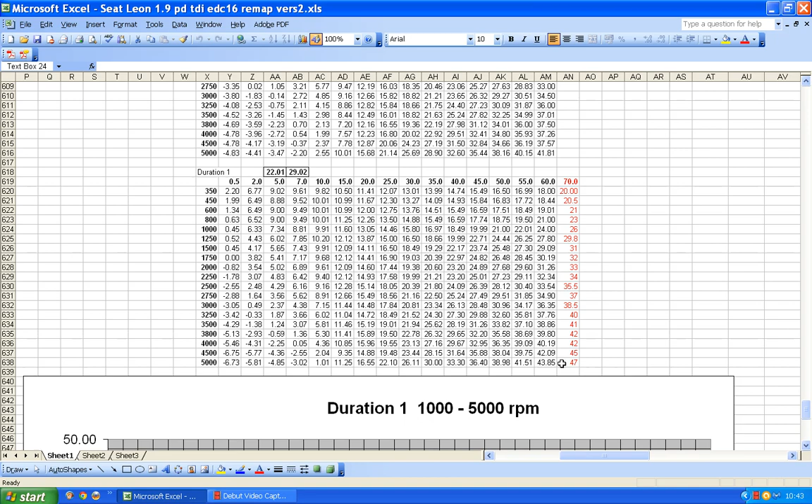So that 27 degrees is the exact point, instant injection of fuel. We know that we are going to be wanting to inject at this point, according to this map, 60 milligrams. And if we go to look at the map that we've been told we should look at, the duration 1 map, there we have 43.85 degrees. So in other words, 44 degrees more or less.

So what we've got then is, I'll put it there, a start of injection which is 27 degrees. So that's what we've got there. In fact, it would be better probably if I put start of injection up there, wouldn't it? And if I say that's my start of injection point, I'll get rid of that.

Let's just format these to ordinary numbers. So I'll just have cells numbers, and we'll have 1 decimal point. That will do us for now. So we'll have start of injection. I'll make those bold as well so we're clear.

So we're going to have our start of injection point of 27, and we know that that's going to give us a duration value which we just saw over here, 43.85. So we're going to have a duration of 43.85 degrees in there. Oh no, I'll make that 2 decimal points. Sorry, I was a bit stupid there, wasn't I?

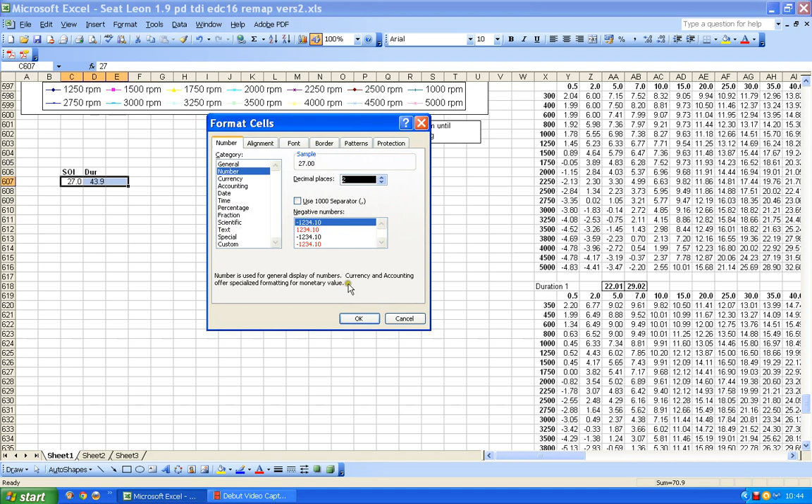Number, 2 decimal points. So okay, we've got a start of injection of 27 degrees and we've got a duration of 43.8 degrees. So we can calculate end, I'll put E, a little O and a big I. We can say when injection is going to end, can't we? I can call that end of injection. So I've got start of injection, an amount of time for injection, and an end of injection. So I can say to myself, right, if I start there, this is where I will end.

Now remember, this one is before top dead center. So if I assume that that is 27 degrees, if I then say to myself, right, now this number here will equal that number minus this number, that seems to be complaining for some reason. Oh, it hasn't got enough space for the minus sign, that's what it's complaining about. So we'll just extend that out a fraction. So there we go. It's giving us minus 16.85.

In other words, 16.85 degrees after top dead center. So what we've now got is a start of injection at 27, a time for the injection of 44 degrees, and because that injection is so long, we are not going to finish injecting until nearly 17 degrees after top dead center.

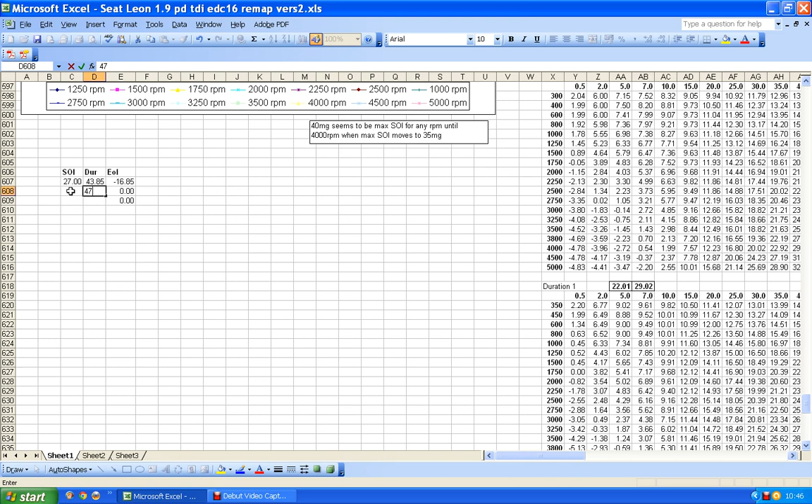But then I leave the start of injection in the same place as I did before. And sorry about the way the numbers have gone silly on me. Let's just format those. Number, 2 decimal places, that will do. Okay. Now I'm finishing at minus 20, in other words 20 degrees after top dead center. So I'm starting at 27, I'm going for a duration of 47, and I'm ending at minus 20, which is 20 degrees after top dead center.

Now you can see that if I'm not careful, I'm going to come really unstuck here, because if the designers thought that 27 and 44 there were okay, so that they could end at roughly 17 degrees and still get power, then that's okay. Now remember, at 17 degrees after top dead center, the piston is starting to go down before the combustion stroke is even pushing it down. Now obviously the engineers have worked out that that is just about okay there.

Now why didn't they just say, well okay, we'll increase that and we'll make it 20 or 30 or 35? Well, they didn't, because if they're not careful and they go to something like 20 degrees after top dead centre, the piston may already be moving too fast down the cylinder for the actual explosive combustion to catch it up. In which case, we are not actually adding any energy to the piston, because the piston's moving away from us faster than the explosion that we're giving.

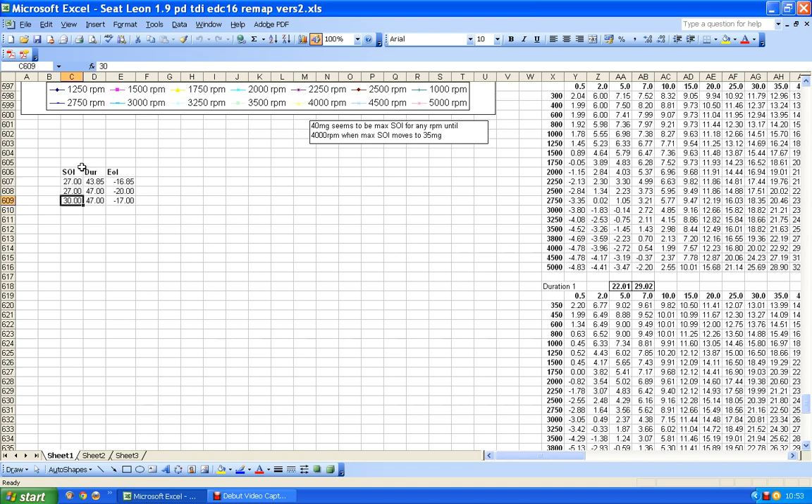So in other words, if you've changed duration and you now feel that you must change start of injection, you don't really change start of injection by changing start of injection, because what you need to do is look closely at your duration values, look closely at where that will leave your end of injection, and then look at where you might want to shift start of injection to allow that slightly longer duration. So the whole thing really starts with duration, even though start of injection selects duration maps. Seems daft, but that's just the way it goes. So you start with your duration, you look at where the start of injection might be, you look at where that means you might end, and then you look where perhaps you should consider changing the start.

Now, I suggest, and some people have argued with me about this, but I suggest you never make a change of more than 1 degree at a time. So in other words, if you decide that you want to increase duration and you want to do it in terms of thinking to yourself, I might have to move start of injection because of what's happening at this end, then I suggest you never go more than 1 degree either way.

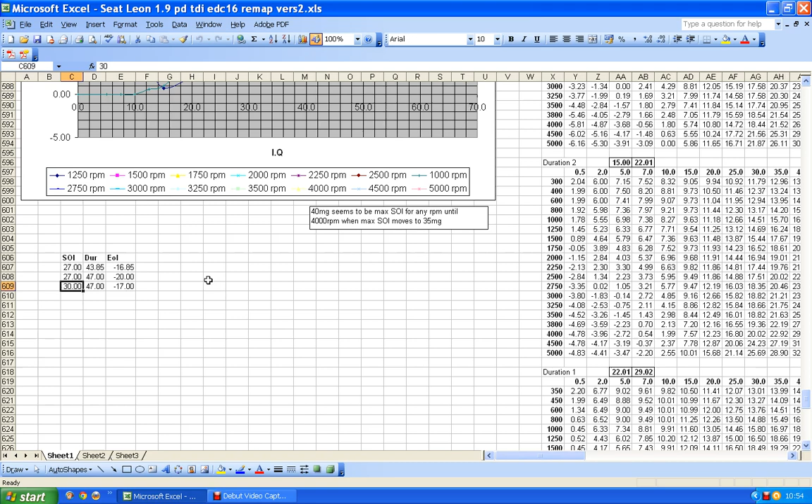So in other words, you say to yourself, well, if I make that 44, 45, I'll move this one to 28. So I will make those two changes together. So when it comes to making changes to start of injection, the changes that you might want to make are very, very, very minimal.

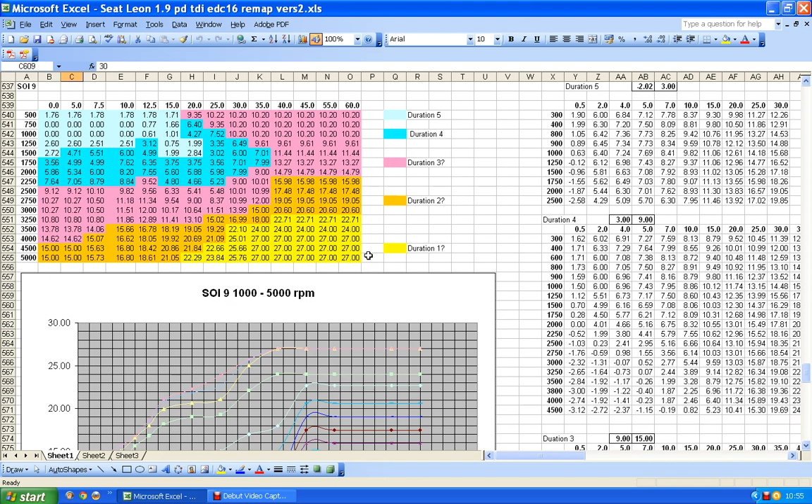In other words, you might want to add an extra column on the end here, and for the most part, most of these values you won't really want to touch, but you might want to change these values here. But you only want to change them, as I've just said, according to calculations you've already done with original start of injection, change duration, end of injection. Now, give an example here. I'm not going to go into this in big detail because once you've got the hang of it, it's fairly simple.

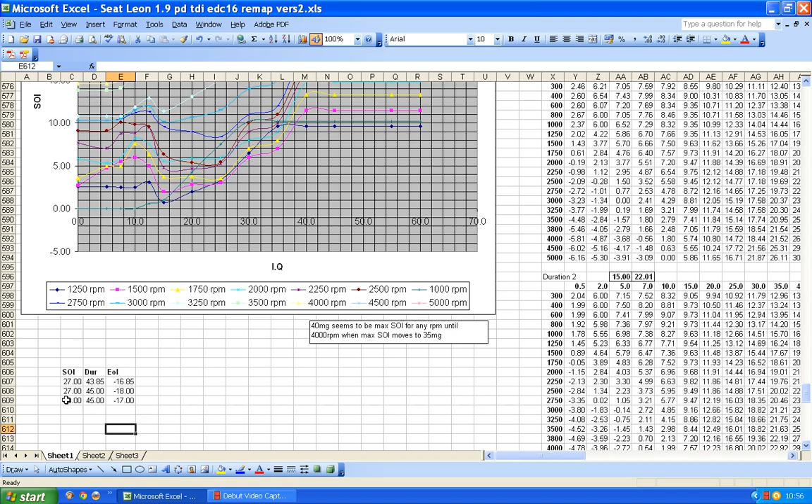If we call that one 44, so we say that one's going to be 45, then that gives me an end point of minus 18. I'm not happy with that, so I say to myself, right, I will still use 45, and then in here I will use 28. So I will go 28, 45, 17. So these are my new figures. So then I would just go to this, I would put in my new column, let's say it's going to be 65. I would look at the figures for each point.

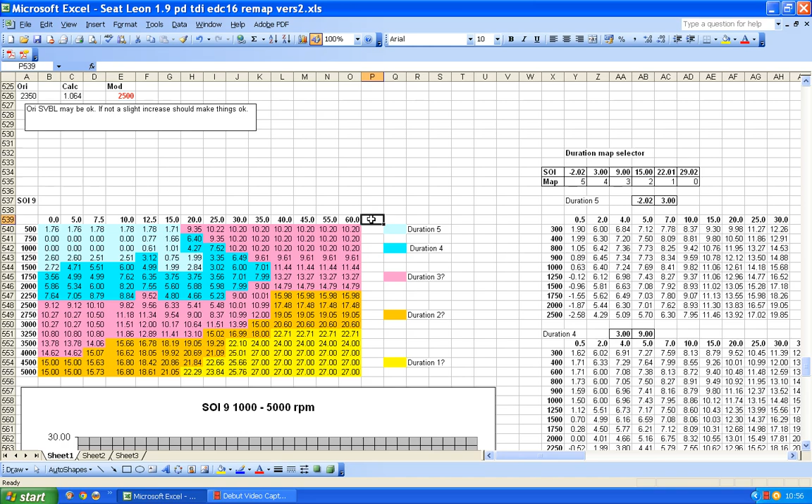So this point here, I've decided that if that is 65, what I would like this one to be is 28. So I would change this one to 28. So I would have 65 here and 28 there. The formatting is daft again, but I'm not going to bother to change that. You can see what I mean. So that would be 65 and this would be 28.

And then I would make exactly the same calculations for these positions, but I would probably not go back all that far. I would probably go back maybe a little way back at first, or maybe go all the way back. It depends. Now, this is where sometimes start of injection changes can be beneficial without giving you a massive great big kick at this end. So in other words, sometimes a slight change of start of injection down this end can make the car feel much nicer to drive.

The big problem with fiddling with start of injection is that you will have quite a change to the emissions, and so you need to think carefully about what you believe the environment around you is worth. Because by changing start of injection and making it earlier, you can have quite a big impact on the amount of nitrogen oxide that comes out of the engine.